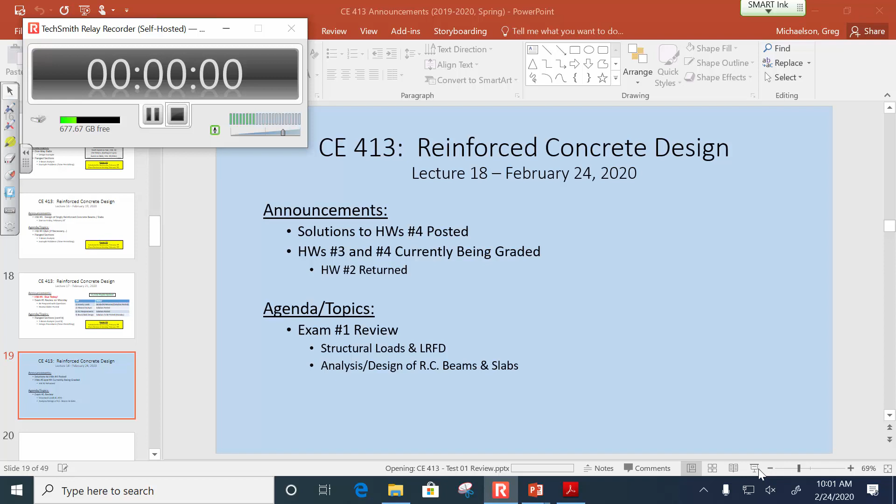Okay, let's go ahead and get started. So here's the sign-in sheet. I just gave you back homework 2. The TA's working on grading homework 3, and obviously working on grading homework 4 since you all just turned that in. I'm trying to get it back to you as soon as we can. I just gave you back homework 2, and as of right now, all 4 homework solutions should be posted online. So you should have everything there.

Did it show up as invisible? Okay, good. All right. What we're going to do today is I'm going to talk about the exam. We're going to talk about just the format and what's on it, and then it's up to you to ask whatever you want. We can talk about homeworks, we can talk about content, we can talk about whatever you want. Just hopefully you came prepared, ready to ask questions.

Okay? So, first off, the exam's going to be closed book, closed notes. As for what you're allowed on the exam, you're allowed a calculator, you're allowed a formula sheet. You can put whatever you want on the formula sheet. Just know worked out examples. You can put procedures, you can put things like that. One thing not to put on your formula sheet are like the rebar tables. Don't worry about that. I'll give you that. I don't need you wasting space on your formula sheet putting anything like that. If there is tabular information that you need, you will have it. And by tabular information, I just mean tabular data of your rebars and things like that.

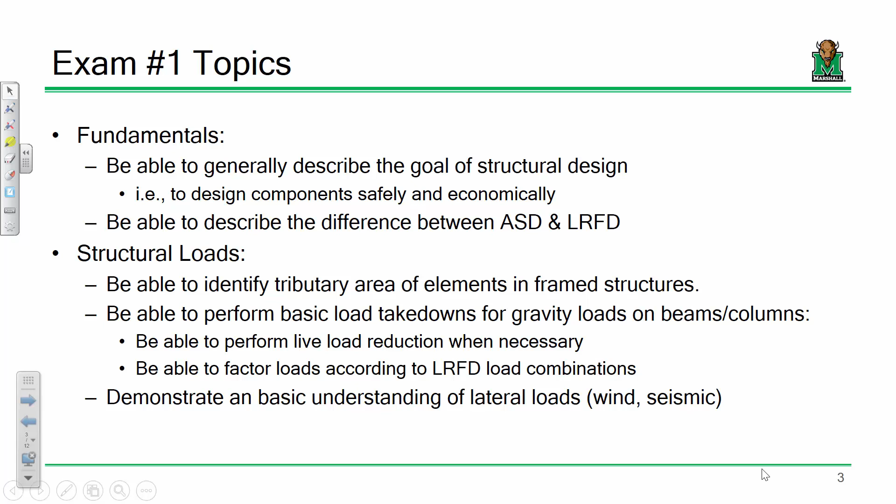Be able to perform live load reduction when necessary, and be able to factor the loads according to LRFD load combos. I'm more concerned with gravity loads in this class. Maybe describe what's going on with wind, what's going on with seismic, but it's not like steel design where I expect you to have a more in-depth understanding of wind and seismic. Here, I want you to have a more in-depth understanding of your gravity loads. So, dead and live, tributary area, things like that.

As for the big topics on the exam, make sure that you can describe the basic properties of concrete, that you know what the stress-strain curve looks like, that it's a non-linear material, and so on. But the big part of this exam is flexural analysis and design. So, make sure that you can analyze beams that behave elastically up until their cracking moment. So that's stage 1 behavior. Stage 2 would be after they crack. So that's the transformed section.

Remember turning your steel into an effective lump of concrete and then computing your cracked moment of inertia and so on. Make sure you can employ the Whitney stress block approach. When I say Whitney stress block approach, I mean the 0.85 f'c block that's a deep and so on. a equals beta 1 times c, all that.

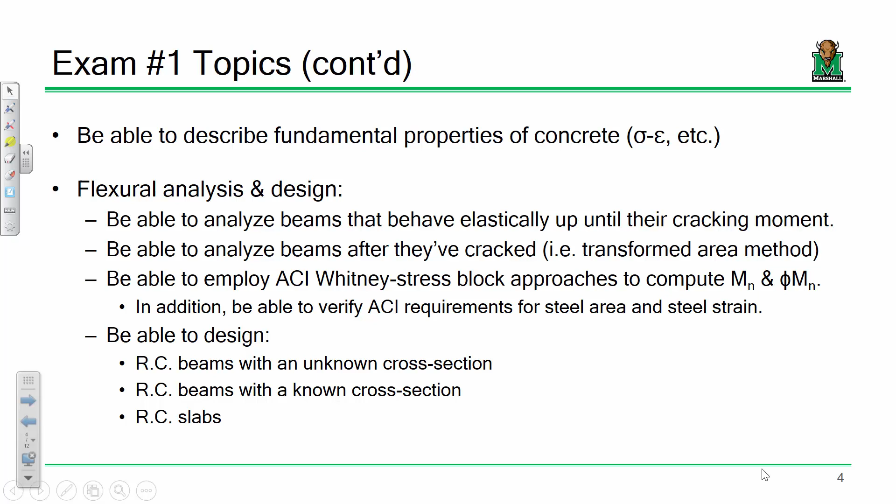Make sure you can do that to compute Mn and phi Mn. We're looking at rectangular cross sections for this exam, no T-beams, nothing like that. Make sure you can verify ACI requirements for the minimum area of steel and the minimum steel strain. Also, I want you to be able to design beams with an unknown cross section, design beams with a known cross-section, and design slabs.

Live load reduction doesn't apply whenever your influence area is less than or equal to 400 square feet. It does not apply when your original live load is greater than 100 pounds per square foot in most cases, and for us that's going to be all the time. Remember, you can't reduce to more than 50% for a beam and 40% for a column.

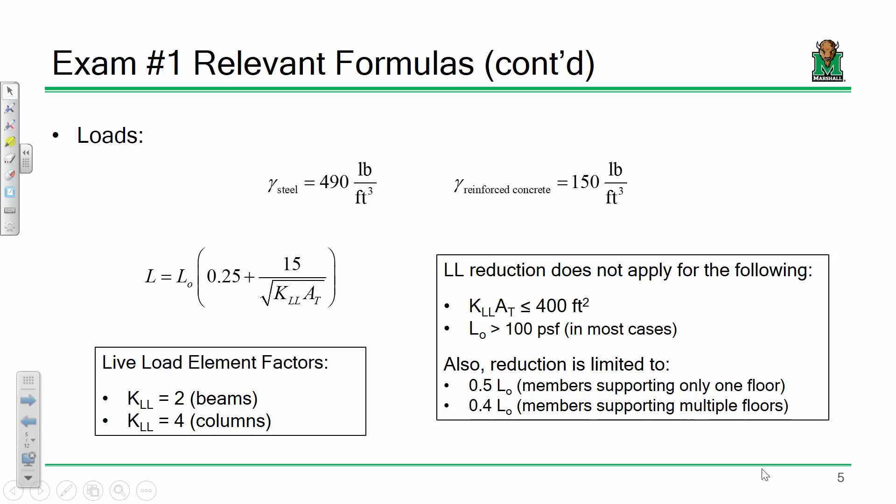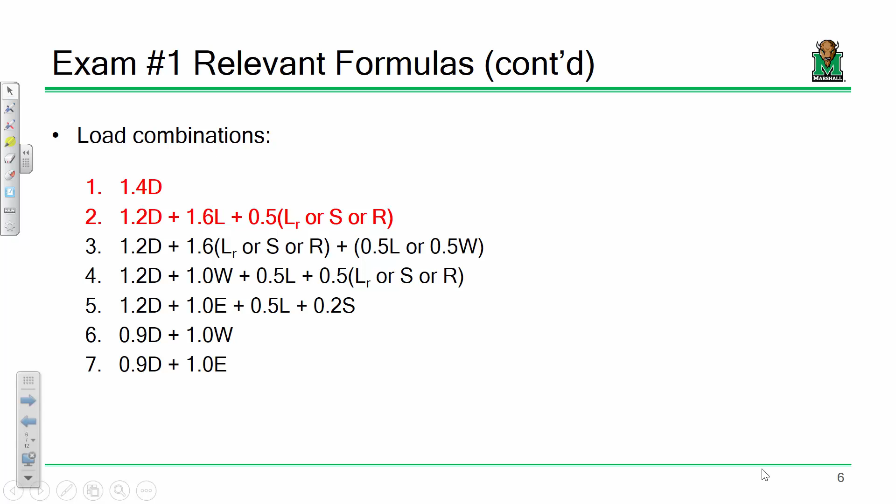Load combos, here are the ASCE 7 load combos. Really the two that we're primarily after are 1.4 dead and 1.2 dead plus 1.6 live. 1.4 dead usually only governs when you have a really high dead to live load ratio, like 90 kips of dead load and like 2 kips of live load. That's when the first one would govern. Otherwise, the second one's going to govern all the time.

Material properties. So what do we got for concrete? Well, we know the unit weight of concrete, the compressive strength, the modulus of elasticity. The modulus of elasticity can be computed as 57,000 square root of f'c for normal weight concrete, and for pretty much any other concrete, 33 times wc raised to the 1.5 times square root of f'c.

Lambda, here are the simple values. Lambda is 1 for normal weight concrete, 0.75 for lightweight concrete. For sand-lightweight concrete, it can be in the middle, 0.85. That's just me distilling what's in the ACI tables. fr, your modulus of rupture, 7.5 lambda square root of f'c. What's the deal with the square root of f'c? We put in PSI, we get out PSI.

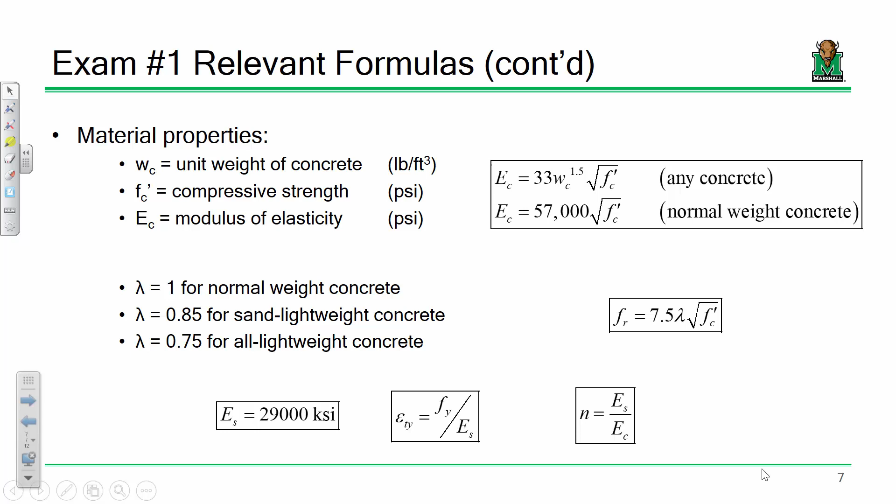Okay, so one real big piece of advice I will give you on this exam is make sure that you are comfortable and cognizant of your units. Units is a big deal on this exam. Young's modulus for steel, 29,000 ksi. The strain of the steel at yielding is fy over Es, and then our modular ratio is the ratio of those two Young's moduli, the modulus of elasticity for steel over the modulus of elasticity of concrete.

So the beam is b wide, it's h tall, but we don't really care about h when we're looking at flexural analysis. We care about d, from the top of the beam to the steel layer. Now the neutral axis, where there is zero strain, that depth is c. The depth of the stress block is a. Remember, a equals beta 1 times c, so there's a difference. The stress block is always 0.85 f'c. Doesn't matter if it's a T-beam, triangular beam, circular beam, looks like Mickey Mouse, it doesn't matter. It's always 0.85 f'c.

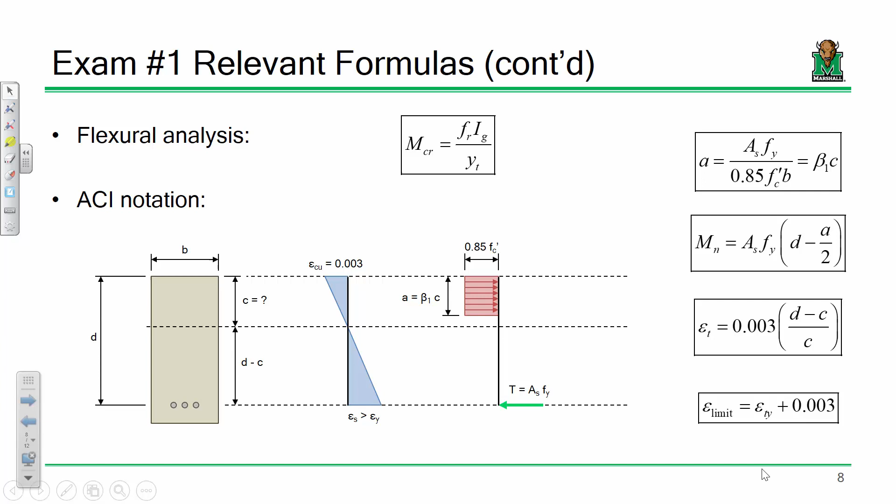Strain in the steel, this strain right here is 0.003 times d minus c over c, just using similar triangles. And then the limiting strain is the yield strain plus 0.003. So if this value is larger than that, that means we're good. It also means that phi is 0.9. If not, that means you have to compute phi.

What else? Beta 1. So remember, beta 1 sort of measures ductility in your section. If your f'c is less than or equal to 4,000 PSI, beta 1 is always 0.85, and then it drops down from there. I put the formula there for you to compute that. If it's greater than 8,000 PSI, beta 1 is 0.65, and everywhere in between it's just a linear fit.

Phi, so for beams, they have to be tension controlled. We assume that phi is 0.9, but it's something we always have to go back and check. When it's all said and done, whether we're analyzing a beam or designing a beam, we pretty much have to ensure that phi is 0.9. In other words, we have to ensure that the strain is larger than the strain at yield plus 0.003. And that's for elements that are undergoing primarily bending.

Later on, when we look at columns, that isn't the case because there is no tensile strain in a column. You're just pushing on it. But if you have a strain value in between, that's how you would compute it, just that linear fit equation that you see there.

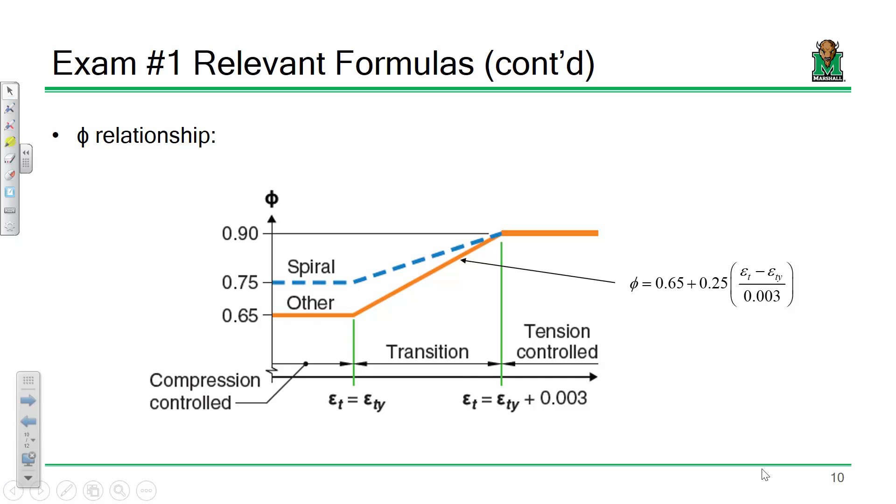Last, I think this is the last thing. No, I don't. Okay, so rho values for design. One of the most important tools for design is the reinforcement ratio. Remember, a reinforcement ratio by definition is As over bd. So it's basically how much steel you have versus how much concrete you have. You can kind of think of it as a percentage. So if your beam is 100 square inches and rho is 0.02, 2 square inches of that needs to be steel. That's an oversimplification, but close enough for government work.

When you have an unknown cross-section, you kind of have to guess a rho value, and there's a couple ways of doing that. One of them is to just guess one, and that 0.18 f'c over fy is just that. The other is to be a bit more scientific about it and compute a rho value based on a given strain. Like, I want to design this beam so that the strain in the steel is 0.01, so what rho value do I need? That's for if you have an unknown cross-section. You don't have a clue what the beam looks like, so you've got to have a rho value to start with.

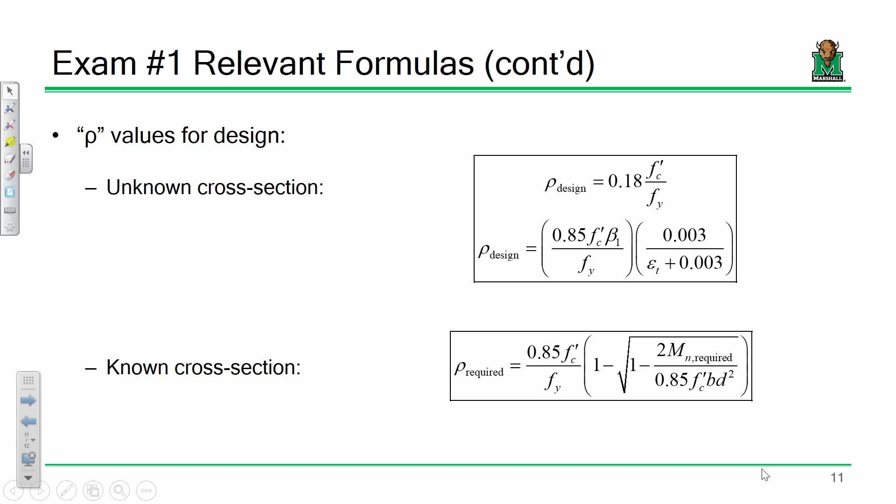What if you do know what the beam looks like? What if you are dealing with a known cross-section design, which is also a slab design? Keep that in mind. If I'm dealing with a known cross-section, I can just solve for it. It's just a little bit of algebra, solving for rho. That's why I'm using rho design versus rho required. Rho required is something I can solve for. Rho design is just a value I'm guessing to come up with some dimensions to work with.

Lastly, we have 2 ACI requirements that we have to meet. Our strain has to be greater than or equal to the limiting strain, and our minimum steel. Our steel area has to be bigger than bd over fy times the maximum of either 200 or 3 times the square root of f'c.

Bless you. Lastly, we've got the slab reinforcement. On this slide, on the left, we have our As required, which is our main steel, and At required, which is our temperature steel. And over here, we have the maximum spacings, either for the main steel or the temperature steel. Excuse me.

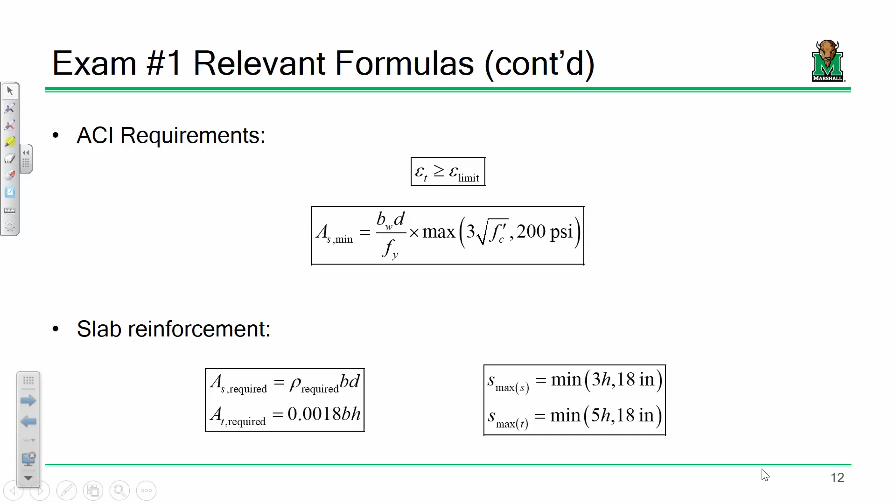That's the exam. Like the steel design exam, it's going to be one set of conceptual questions and then 3 problems. It'll be the same thing. I will tell you 2 other things. I am still going to use my rule of 3, although I think the steel design folks wish I'd use a rule of 4 or something like that. Maybe I'll look at that.

But I will say one final thing before I turn it over to you. Some of the examples that we did in class and some of the homework problems were kind of long. They're really big, right? I know that. And I'm not going to make you do 3 full-blown design problems in an hour. I might have you do pieces of a problem or a small snippet. But my intent is to not design a test that is impossible to do in an hour. I don't like that.

That's my intent. I've always used a rule, whether it's 3 or 4 or something. My goal is to ensure that I'm not designing an exam that's impossible to do. Am I going to have curveballs on the exam? Yeah, probably I will.

That's just fun on my part. You're like, yeah, it's not very fun for us. But if you understand the material, if you understand the process, I think you're going to be fine. I'm going to shut up now. Floor is yours.

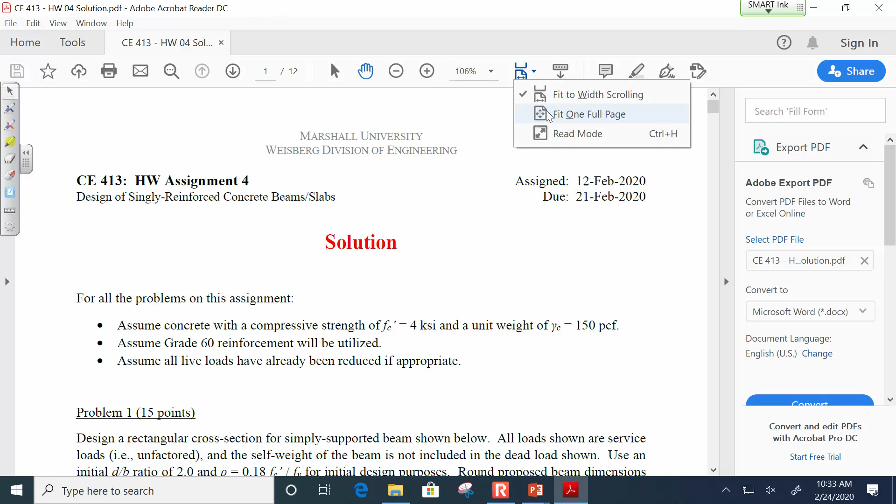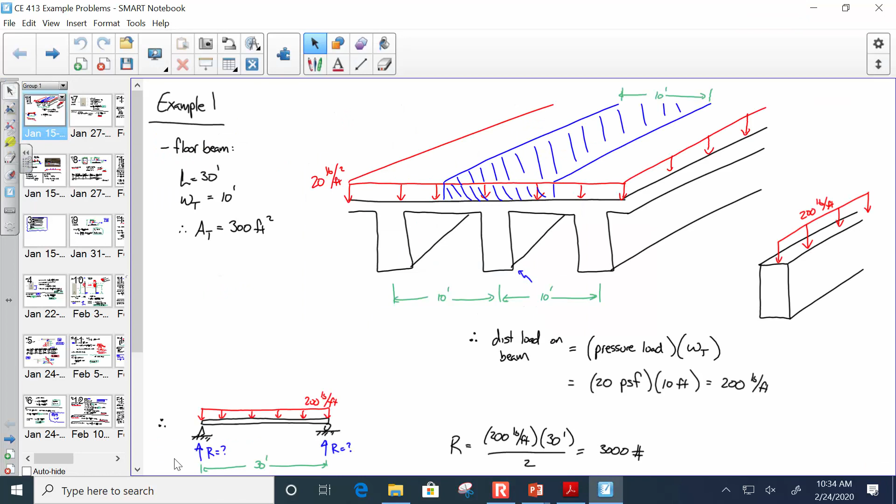I have here the solution to homework 4. If you go to problem 2, yeah, I got 72.5. Does that make sense? This is what I was saying on that slab problem. Remember that slab problem that we did? Here, I'm going to pull that up. No. Remember this? So this was the slab problem that we did.

And remember how there were these two methods? How you could factor the load and then do WL squared over 8, but then you could calculate each moment independently and you get the same answer. The reason why you have to do this method is because they're not both simply supported beams with uniformly distributed loads. The load cases are different. Once the load cases are different, you had to treat dead and live loads separately. I swear, I saw some people on homework 4 that were still like, yeah, but I'm still going to try and do that. No. No.

When you do that, what you do is you underestimate the amount of moment. Okay? You underestimate the amount of moment. All right? Let me show you. Watch this. Let's say you have a beam that's 40 foot long, okay? And it has a distributed load on it that's 3 kips per foot. What's M max? Well, it's WL squared over 8, which is what? 600.

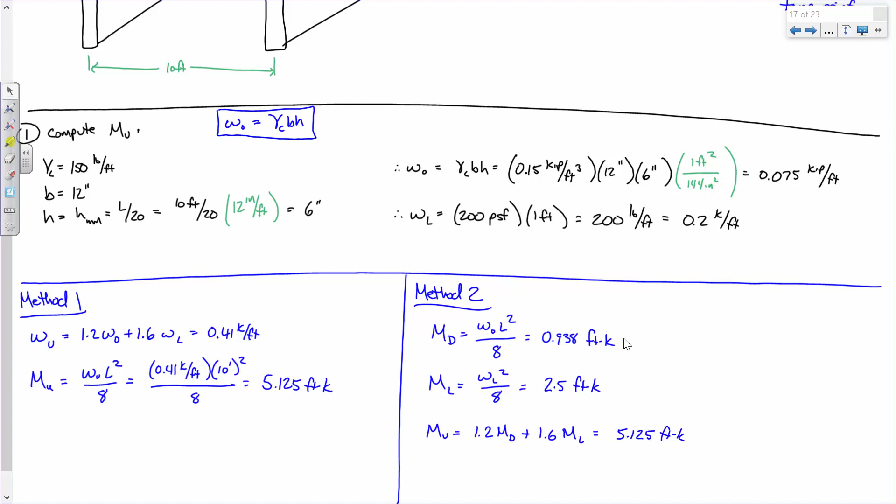If you go to problem 1, for instance, here's problem 1 that I gave you on the homework assignment. I've got dead load that's spread out, and I have live load that are 2 concentrated loads. Now, how many of you said, okay, this plus this is 70 divided by 27 is another distributed load, and then we'll do 1.2 times dead plus 1.6 times live. Anybody do that? Hope not. That's bad. That's not good.

The live load is lumped in these 2 spots. If you take it and spread it out, that's an unconservative option. The worst case scenario is that those loads are lumped right there, okay? So you fictitiously spreading it out is wrong and is unsafe from a design standpoint. Does that make sense? Don't do that. Nope.

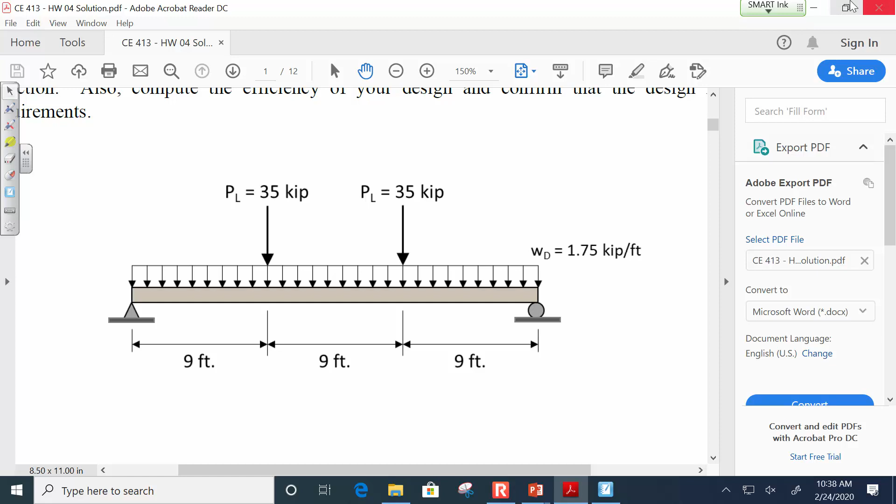All right. I've diverted enough. There's got to be more questions. There's got to be more questions.

None at all? Are you going to do some engineering 216 on us for the gross moment of inertia? That's a good question. If I do, it won't be anything terrible. No, honestly, probably, but it won't be anything terrible. My focus on this exam, though, is rectangular cross sections. That's my focus. I'm not even trying to curveball you there.